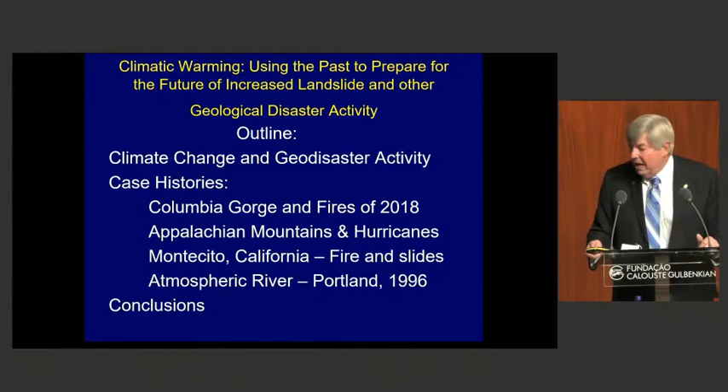That was Montecito. And then I'm going to end up talking about atmospheric rivers. We never really had this name until just about 20 years ago, and now it is becoming very, very common. Why? Because the climate is warming and we are getting more of these atmospheric rivers. I'll talk about one I was very involved with in 1996. But I just came from the Pacific Northwest—Oregon, Washington, and British Columbia—and we had a huge atmospheric river that just hit us last week. I was on television three times just last week talking about this. So that's what I'm going to be talking about today.

So to begin with, climate warming. In the last two weeks we've been talking about COP26 in Glasgow. The whole world has been focusing on the temperatures we've got—1.5 degrees Celsius, that's where we would love to have the temperature maximally increased to, after the original pre-industrial temperatures. Lots of ideas came out about this. Right now we're at 1.1. But all of these different climatic models that we have in the world, they all agree on one thing.

We are going to have many extremes—it's either going to be very, very wet or very, very dry. And with the dry, you're going to have many fires. It all goes back to water and evaporation from the ocean. The warmer the temperatures, the more water that is evaporated into the air masses, and therefore you have greater rainfall intensity, which causes more landslides and other things like that. So we'll talk about the wetter and drier things coming up.

So when it is wetter and there's more water in the air masses, you're going to have hurricanes—more hurricanes, and bigger ones. We have categories 1 through 5, and we're going to be seeing more of these higher categories. Typhoons in the Indian Ocean and also the Pacific Ocean are equivalent to hurricanes—same thing, more and bigger.

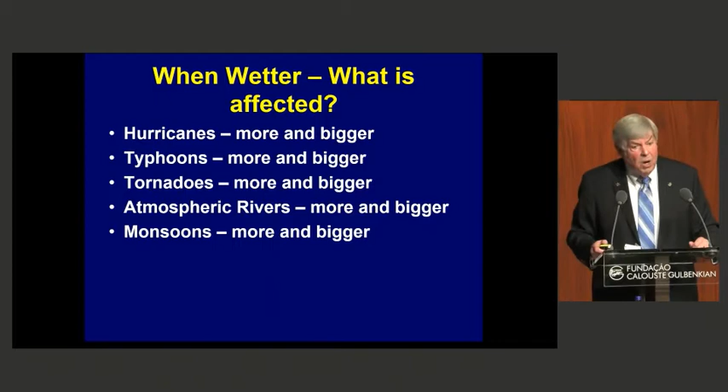In the United States, we have tornadoes. It used to be in just one small area in the middle part, in a very short period of time, for three months. Now it is eleven months of the year, all the way from Mexico to the Canadian border—more and bigger. And then these atmospheric rivers, which I'll explain coming up—there are going to be more of them and bigger ones. Then in India and that part of the world, monsoons—more and bigger. So those are going to be affecting there.

Then on the drier end of things—see, those are the two extremes—what we're going to be having is more fires. You've seen, for instance, in Australia, all of the fires they've had there. In the United States, the western half has a huge problem right now, and in my state of Oregon we've had many, many fires. South America, the same thing. And Africa—I'll mention Madagascar on the next slide. So all of these places are extremes, and that is coming with climate warming.

Al Jazeera, the English version that just came out last week, listed six areas that are the worst hit by climate change in the world today. Madagascar, in Africa—the drought is just awful. South Sudan, the opposite—many, many floods, the worst floods in 60 years. In India, they have both: in parts of the country it's big droughts, the other parts are floods, and people are moving around. They estimated 70% of all households in India have moved because of the climate, one way or another. Bangladesh just has flood after flood after flood—7 major floods in the last 20 years.

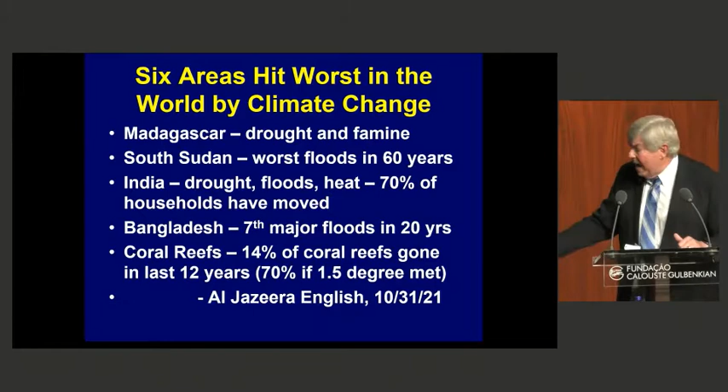And then the coral reefs around the world, which give us a lot of the seafood we have—they've figured out 14% of all the coral reefs are destroyed. And if we do not hit that 1.5 degrees Celsius boundary, we will lose many, many more in the future.

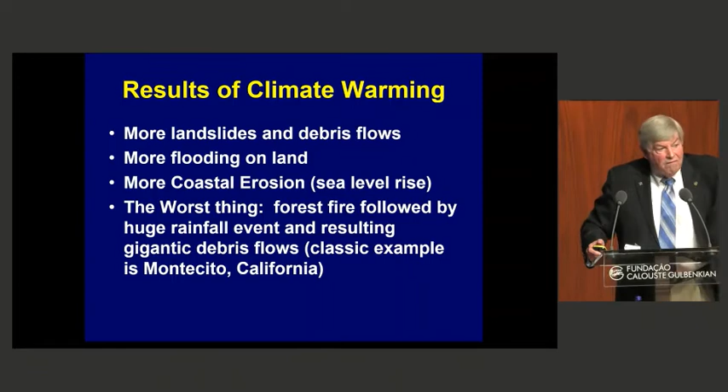The results of climate warming include more landslides and more debris flows, which I will be talking about a lot. There's also more flooding. Along coastlines around the world, because sea level is rising more and more, we will have more coastal erosion. And the worst thing is when you have a combination of fire followed by major rainfall events, and I will talk about Montecito.

As I mentioned, we also have increasing sea temperatures, more hurricanes, typhoons, etc., and then greater rainfall events that we've got.

To begin with, for my first case history, I need to review forest fires. In my state of Oregon, we have many forests - big, intermediate, and small ones. Dry forests are found all over California, Nevada, Arizona, and eastern Oregon. They have very tiny, dry trees like oak and juniper trees, so forest fires are common there. Why? Because it's less than 400 millimeters of rain per year.

But then you have intermediate forests, where we still have big trees like ponderosa pine trees. Average precipitation is 400 to 600 millimeters a year in those areas. You have more fires, but not as big ones. Then in the wet forests, where I live, we have Douglas fir and western hemlock - big, beautiful trees. Forest fires are very rare there, even though at the end of summer it doesn't rain for 2, maybe 3 months. But the yearly rainfall is 1,500 to 2,000 millimeters per year.

So when we have fires in the dry forest that I mentioned, you have abundant debris flows afterwards. You'll have rockfall and activation of small landslides. It's very similar in the ponderosa-type forests.

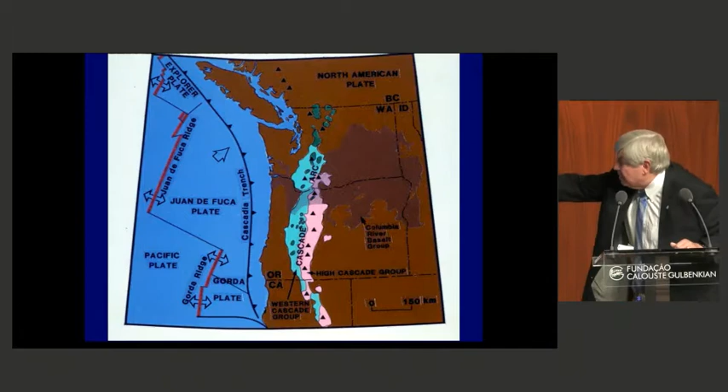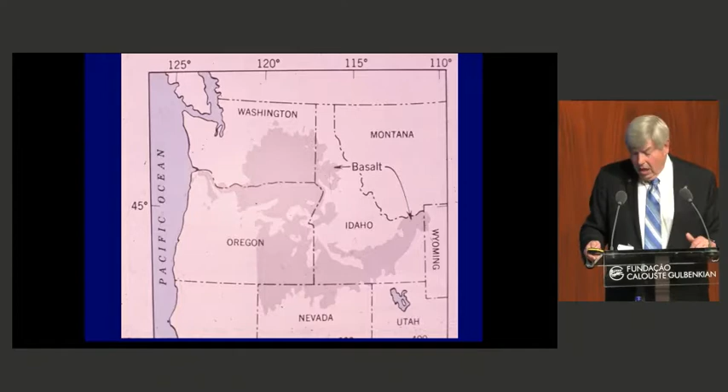We had a fire back in 2017. This is a rainforest - it gets over 2.5 meters of rainfall a year in this particular area. Here's a map of my part of the United States: this is Canada, this is Washington, this is Oregon. We're talking about this area right here. It's all basalt, one layer on top of another, coming out of a hot spot. That hot spot is now over in Idaho, right underneath Yellowstone National Park. We have similar geology all up and down the area, and in it we have the 5th highest waterfall in the United States, Multnomah Falls.

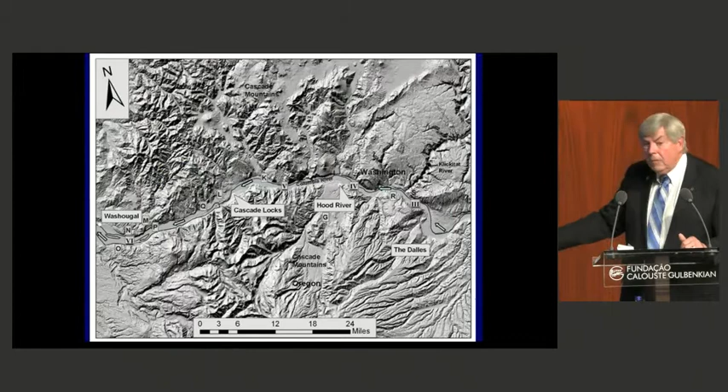There's one lava flow from here to here, one from here to here, one from here to here, and there's a couple more up above. That is the area where we head. So we look at a shaded relief map of the area. Here we're looking north, and here is the Columbia River moving to the left out to the Pacific Ocean. This is the height of the Cascades right here, and I'm going to be showing you this area. That's where the forest fire happened.

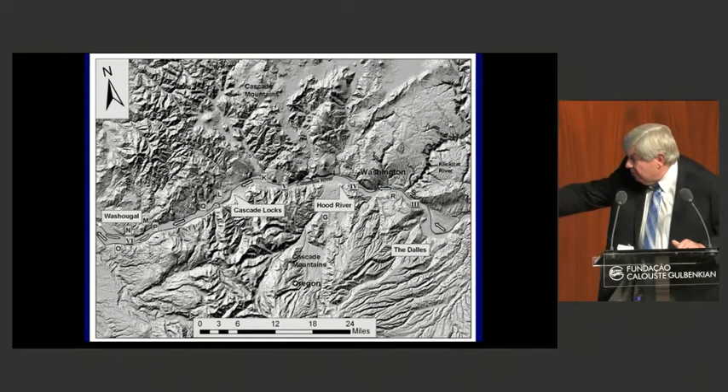This whole area is what we call a national scenic area. It is not a national park. You can have houses, but anytime you build any business or house in there, it has to pass a commission and has to look good. It must not stick out because they want the trees and the rocks and the nature to stick out instead. In our area of the state of Oregon, it's the number one tourist attraction, and it was created back in 1986.

I apologize, I have everything in acres, and you're all used to hectares, but all you have to do is take my number and divide by 2.47, and you will get your hectares.

Just two years ago, 17% of this absolutely beautiful area burned. It started in September, in the fall, and it was started by a high school kid. He was goofing off and he lit a fire in a field, and then he put it on Facebook: look what I did. Well, in the end, his family got charged with a $15 million bill to help, and for the rest of his life, every summer he has to plant trees as a result of this.

So the fire started out in the mountains, and you can see the beautiful forest that we have in this particular area. Here is a map. So here is the Columbia Gorge. Portland, where I live, is to the left. And it's called the Eagle Creek Fire.

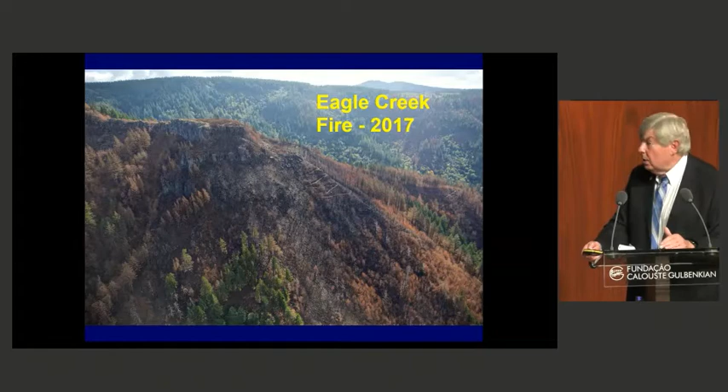This is also an area where a lot of people go hiking, and the views from the top of the gorge are incredible. After the fire, they had to close down all of those trails. So here's the Eagle Creek Fire that you can see in the state of Oregon. I live down in Portland, down here.

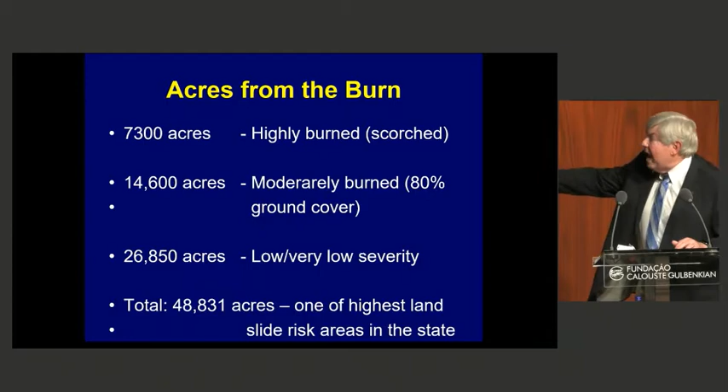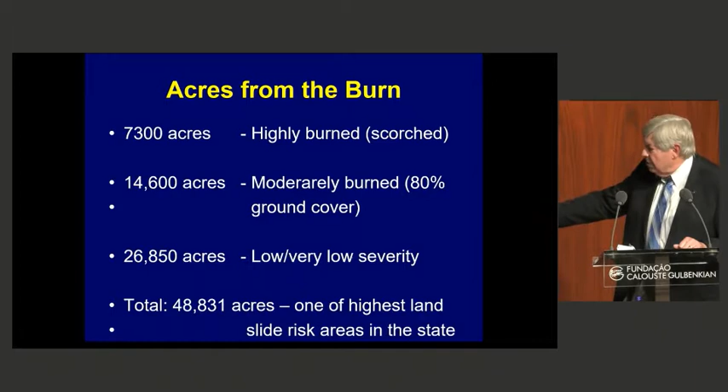In the end, we almost had 50,000 acres burning, 17% of this whole national scenic area. 7,300 acres were highly burned, scorched. There was no A horizon or O horizon left, just mineral earth. Then moderately burned areas, 80% was still there. And then low burn ones, which we'll show you in a second.

So what we did is we went out and actually flew the whole area taking air photos, and then digitized it, figuring out how much of this area is heavily burned, slightly burned, etc. Here is the gorge right here, and this particular Oneonta Creek Gorge was heavily burned. Then the one right next to it, Horsetail Creek, then Tanner Creek, and then Eagle Creek — those are the areas that were the worst burned.

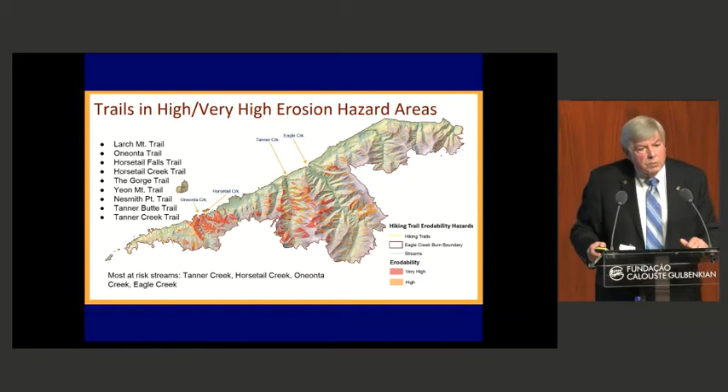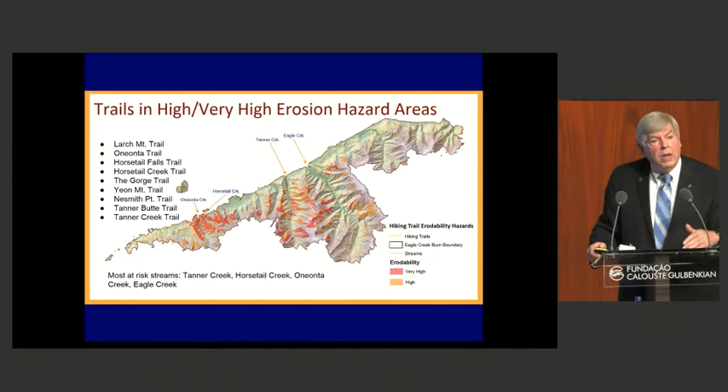We are now predicting — remember, this is a rainforest, and those roots are still holding the rocks in there — so it is going to take 5 to 10 years for the roots to break down and the debris flows to come out. Right afterwards, we had lots of surface erosion, and the creeks were very, very black in color.

We had increased rockfall on all of the trails, and that was important because we had to close down all of the trails. Engineering geologists had to hike around and see each one of these trails to determine if there was a potential for rockfall coming down. I'll show you an example of what we did in an earlier fire.

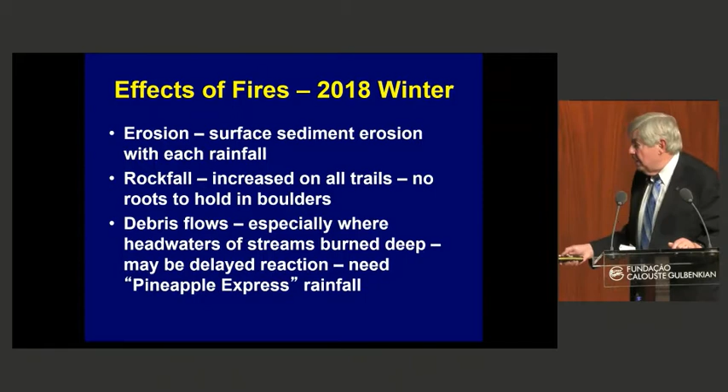I did a lot of television time, and everybody said, what do you predict? I said, we got to go back to 1991 when we had the last forest fire here. Everybody said, we had a forest fire in 1991? Yes, but everybody had forgotten about it because the rainfall was high and the vegetation had grown back. It went right down in back of Multnomah Falls, which I just showed you before. But I said, what happened then will occur in the future.

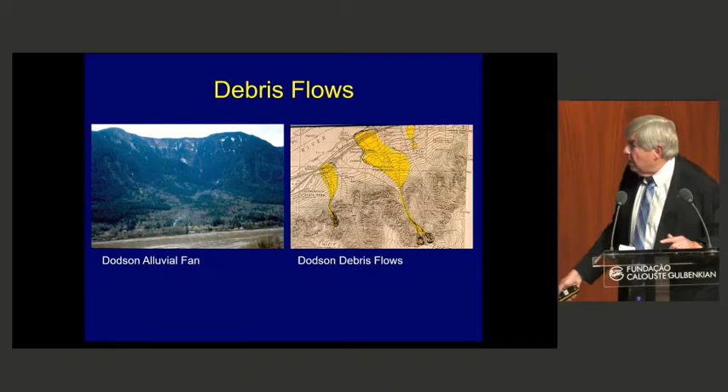Remember, that was 1991. This is 5 years later, 1996, when we had these particular debris flows occur. Mrs. Royce was making lunch, and she looked out in the pasture in back of her house, and she saw a wall of 2-meter-high boulders rolling across the pasture towards her. She said to her husband, 'Hirsch, I think we better get out of here.' The good news is it was moving very slowly, and that was the front of a debris flow coming down, and they survived. Over the next 4 days, their house was completely filled up.

In back of where I took this picture, this is what the highway looked like, completely slowed down. If we went to the left over here, that is where the next debris flow came down, at 10 o'clock at night. The highway with all of the trucks was stopped and they were lined up, and the train, a major transportation corridor, was also stopped. At 10 o'clock that night, the debris flow came down at a very fast velocity, knocked 6 cars of the train into the river and 9 trucks into the river as a result.

If we went back this way, 2001, another 5 years later, we had another debris flow come down and fill up the intersection there, coming out of that area. So it's this delay reaction: 5 to 10 years later is when you get the major debris flows coming down, something that nobody had actually taken a look at.

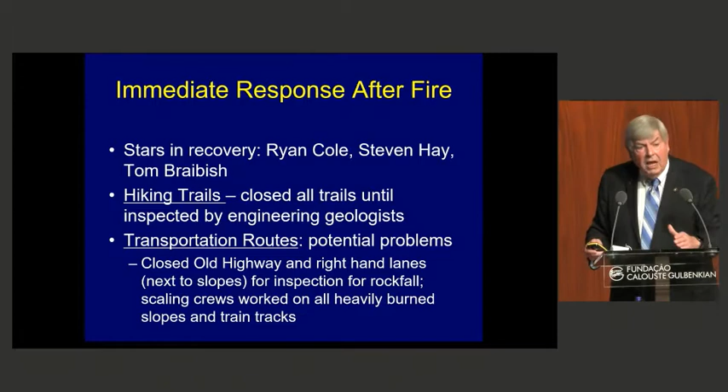I was very proud after both of these fires because my students, Ryan Cole, Steven Hay, and Tom Braibish, the last two working for the highway department, closed down lanes. You could not have cars next to them until all the slopes were checked by an engineering geologist or rock mechanics person. Ryan Cole ensured hiking trails could not be reopened until checked out by an engineering geologist; some were closed for a year and a half. The transportation routes and hiking trails stayed closed until we knew it would be safe for people to go on them. For these fires in this type of forest, with high rainfall events, we know we will have future debris flows, and we have predicted and shown you the 4 that we have there.

But it's a delay of 5 to 10 years that is going to be down the road. And actually, we had one from the previous year that killed a lady just this past year.

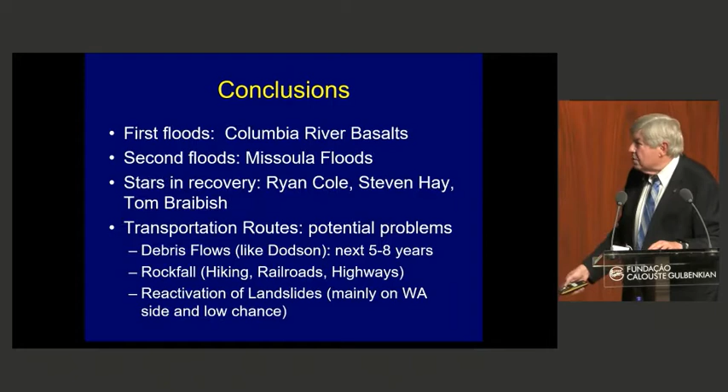Okay, so these are where we predicted. Let's move on to the next topic: climate change in the western half of the United States and the wildfires we've got. This was a report that just came out last week, and some of the fires we had in Southern California.

But I really want to highlight the poster child, the best example of a major fire followed by a major rainfall event: Montecito, California, January 2018. A dry area of Southern California just outside of Santa Barbara. Remember, it's a dry forest with very small oaks, so it burned a very large area. The U.S. Geological Survey came in and mapped the whole area.

Two days later, they had a susceptibility map showing where the debris flows would originate from and where they were going. That report was given to the city of Montecito, but it didn't get applied. This is a problem: the communication between the scientists and the governmental agencies.

Then on January 9th, just one week later, a major storm came into the area. 23 people were killed, 163 injuries, $177 million in damage, $7 million just in emergency response. A lot of times we forget how expensive it is to have all the emergency personnel coming in afterwards.

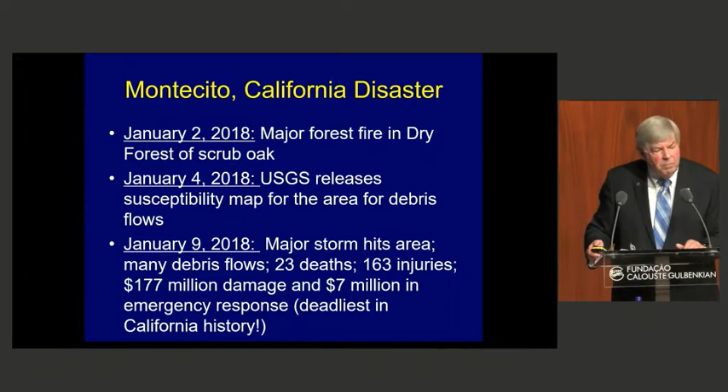This is what the whole town looked like - all of these debris flows with large boulders coming down, hitting the houses, destroying the houses. 23 deaths, and then 400 houses damaged or destroyed. This is always something that we have to worry about.

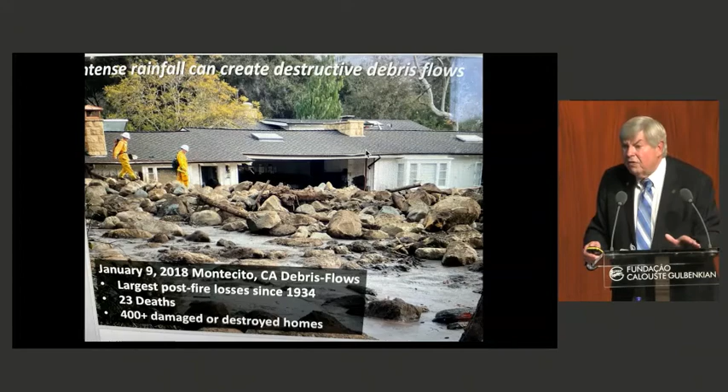And that's why the U.S. Geological Survey works on it. Here's their model: they immediately get in and map where all of the burning occurred and the degrees of burning, as we showed you in the gorge a few minutes ago. Then, based on their models, they predict this area will produce a debris flow of this size, that area will produce a debris flow of this size, depending on the rainfall. So here they look at the potential rainfall coming in, and the amount of material moved.

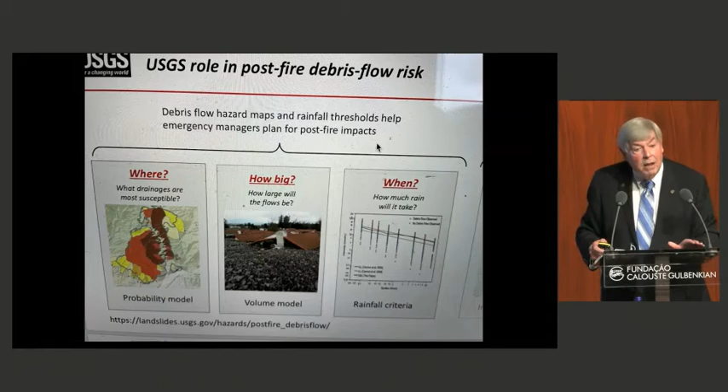This is important - something to try and save lives and save property. The problem is, in this case, the report came out, but it was not enacted by the local government there. Now we know better about doing this in the future.

This is the last of the case histories I wanted to talk about, which occurred in the Pacific Northwest: the atmospheric river. This was a term we weren't using 2 or 3 years ago, but now everybody who is a weatherman or weatherwoman on television and radio is always talking about atmospheric rivers.

This is from my newspaper on November 17th - just a very short period of time ago that this hit. This is the area of northern Washington, the next state up. Everything was flooded out, with lots of debris flows and landslides created as a result of this.

In the old days, we used to call these pineapple expresses. Let's see what an atmospheric river actually is - they're found all over the world, coming from the central part of either the Pacific or the Atlantic. Europe has them too.

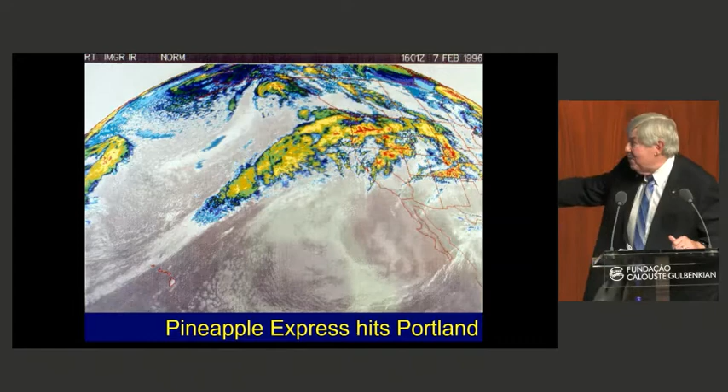Here's Hawaii - we call them pineapple expresses because they came from the land of pineapples, with very warm temperatures loaded with water, and then they come in toward the Pacific Northwest: California, Oregon, Washington, British Columbia. This is one from 1996, but the same thing happened this past week, and that's what we were dealing with.

As I said, the name atmospheric rivers only originated in the late 1990s. Two professors at MIT in Boston came up with this idea. This is a very narrow band of very wet moisture coming into an area, and they originate from the middle part of the Pacific and the middle part of the Atlantic.

What they do is cause lots of landslides, debris flows, and floods as a result. The last major one that hit Europe was in 2015. It originated in the Caribbean and aimed mostly at the UK, United Kingdom.

Something that has just started is now they are going into categories. They have category 5, 4, 3, 2, 1. Category 5 is the wettest. It's just like they've done for many years with hurricanes, and when you have a category 5 hurricane hitting you, it's a big one.

This has only happened in the last 6 months. This atmospheric river event that hit the Pacific Northwest was a category 5. And all of us said, wow.

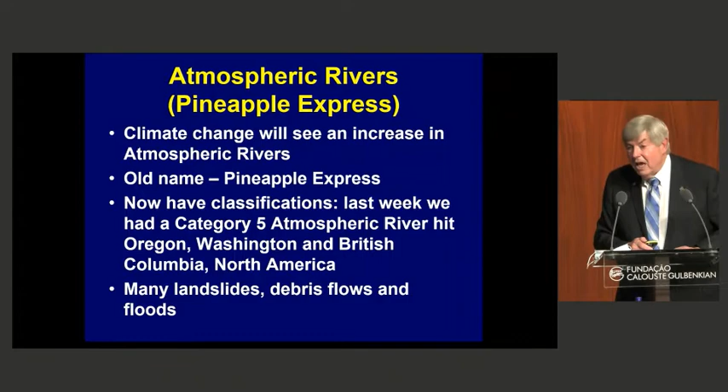Generally in Oregon, where I live, we get one category 5 a year. Washington gets one every 2 years. California, Northern California gets one every 3 years. Southern California, one every 10 years. But in California, they need water. So it's always about 50% of their annual precipitation that comes from these events.

I want to take you back to 1996. That was our last major pineapple express, or atmospheric river, that came and hit our area. In 4 days, we had 20 centimeters of rainfall fall in my city. My city has some big mountains and some flat areas.

I had 3 graduate students who were working with me, and we had lots of flooding, but we also had lots and lots of landslides. So for the next 2 months, we visited all 712 landslides that we had in our area.

With that, we categorized each landslide. What was the process? What's the geology? What's the soil? What's the slope angle? All of those things, trying to put together a story, trying to figure out that in this extreme event, certain parts of town would get certain types of landslides, and other areas would get other types. So I'm going to show you a few examples.

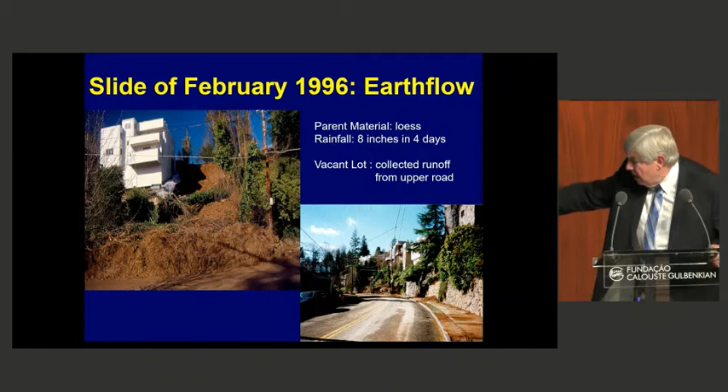A lot of these are going to be urban, but some are also debris flows. For instance, anytime you had a vacant piece of property, who owns that property, who controls it? We had many landslides on them. You can see an earth flow that came off of this piece of property, a nice house here - I'll show you the other side - came down onto the road you see here.

In the next one, where did all that water come from? Well, all of the storm water went down the street and had no place to go. It just went over the edge. There was no collection basin or drain there to pick it up, and you had a major landslide.

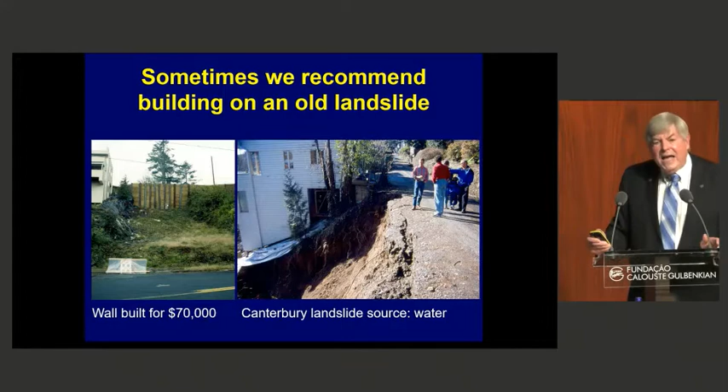So what do you do? You build an I-beam wall - one standard graduate student for size there. But they forgot to put a drain in to collect the water. Two years later, what happened? The whole thing blew out, and it was exactly this time of the year, because it came across the street and hit this lady's house.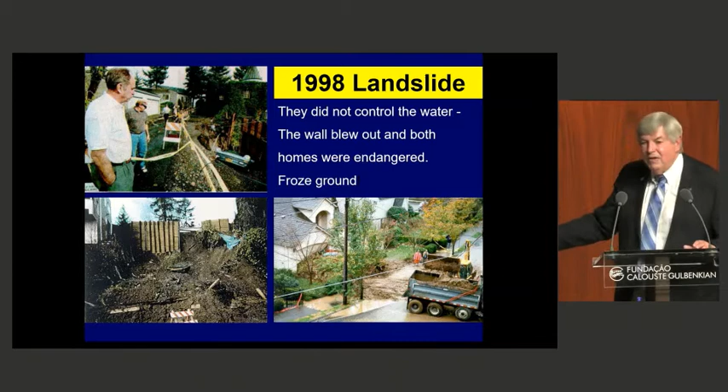In the United States, every year we have a special holiday called Thanksgiving - it's coming up this Thursday. She was having 12 people in for a Thanksgiving meal the next day. She was a little mad at having her house hit. This was just an example.

In the end, this is the only time in my life I've ever actually recommended building a house on an old landslide, because you had a huge hole in the ground. They tried to freeze the ground next to it because you had a castle here, and the walls were falling off, creating huge cracks inside. Freezing the ground did not help.

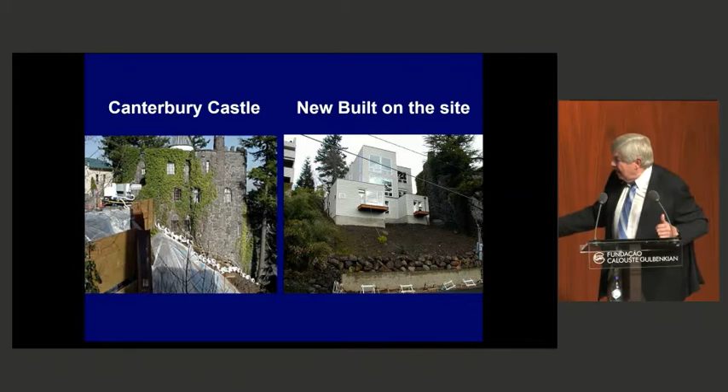So they built a house, over-designed by the geotechnical engineers. But actually, I don't think it's a very beautiful house in between all these others. But it doesn't matter - it stabilized the slope. They've never had a problem since that time.

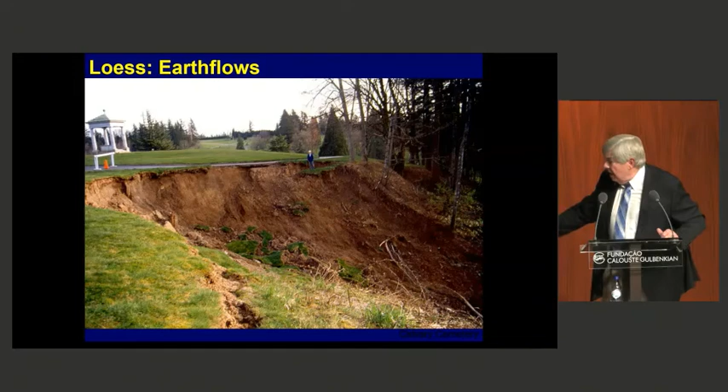Let me show you some other examples. A cemetery, very close to us. Where most of the landslides occurred are the mountains next to Portland. These are loess soils, wind-blown silt, L-O-E-S-S - for those of you who speak German, Loess is the name - and ML soils, they are highly erodible. You can see, in English, we would say there is a grave situation in this cemetery that we have here.

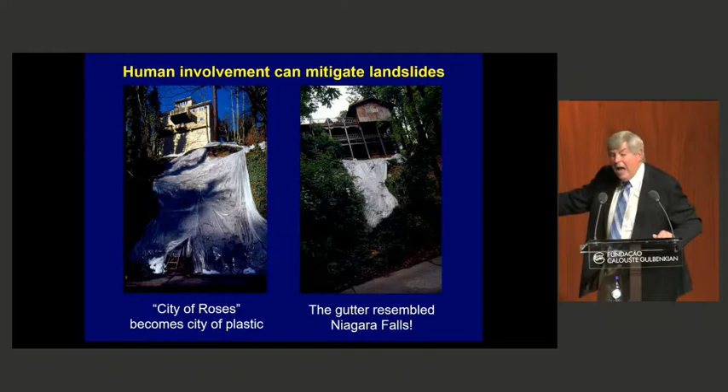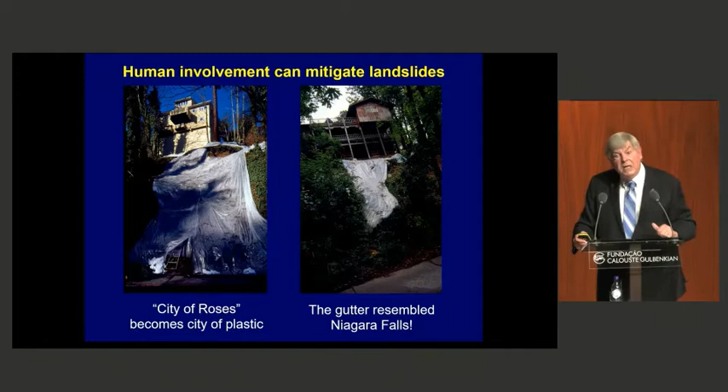As we would travel around the city of Portland, we would map all of the plastic because it meant that there was a landslide there. This house had to pay over $100,000 to repair and stabilize their land. This one, $70,000. And when we talked to the people here, the lady said, I had a waterfall coming out of my plugged gutter for 4 days. All that water concentrated here, and what happened? It failed and you had a landslide.

This is typical in an urban area where you have these types of things happening. But you didn't always have exciting landslides for me. We had 4 houses in a row right here, and what it did is reactivate the upper part of an old landslide, a paleo landslide. If you looked out the window from here down the slope, you can see the hummocky topography of an ancient landslide. The whole thing reactivated.

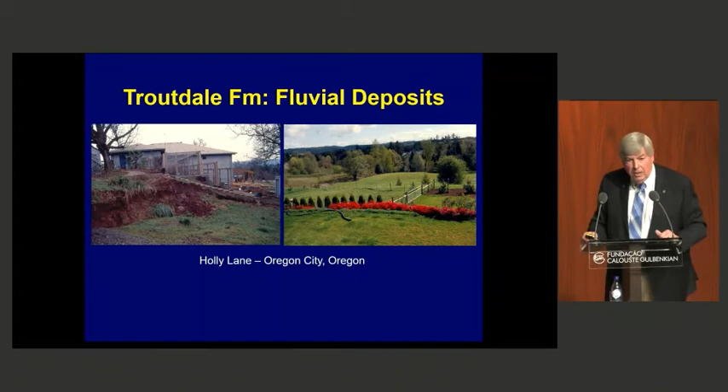When an old landslide reactivates, it also reactivates at the scarp, and it dropped 1 meter, going right through the houses. All of those houses had a big crack going right through. All of the pipes, all of the electrical, all broke. All of the driveways, etc., all went down. As a result, those houses were destroyed and had to be removed. Reactivation of an old landslide, big deal.

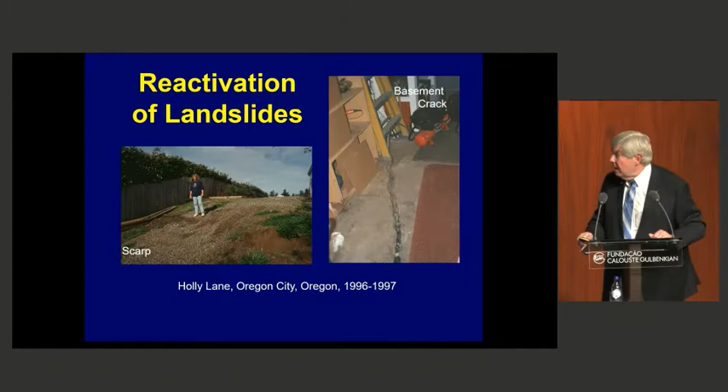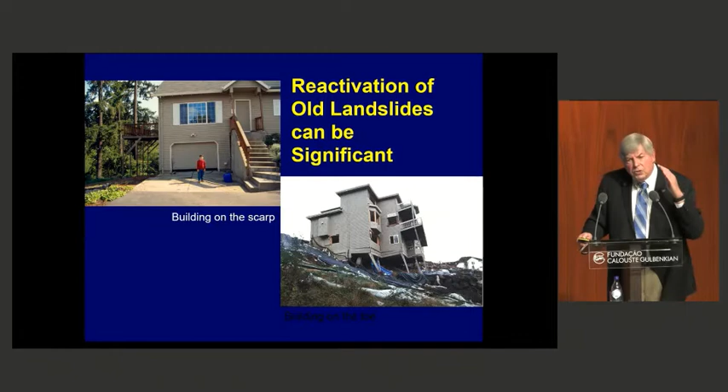Here's also reactivation of a landslide. This house was on a slump, and it just rotated like this. This one went right through, a new house, only 2 years old. The crack went right through, and the house was destroyed completely as a result. This is typical with these atmospheric rivers, huge amounts of rainfall in a short period of time.

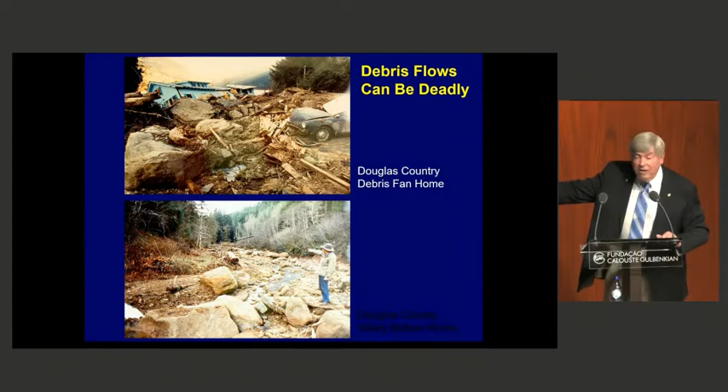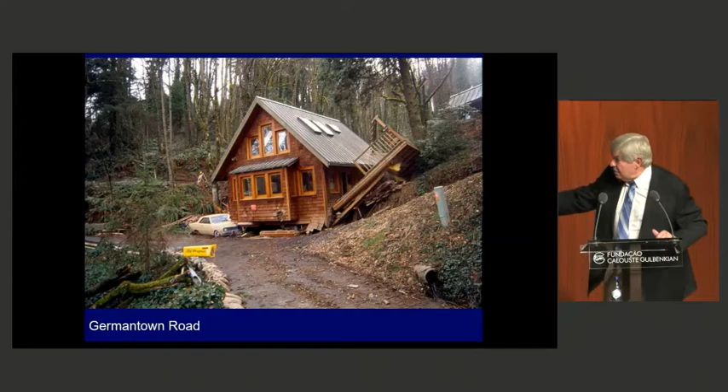It's a process that has been there for a long time, and it happened again. In this one, in the valley over the mountain that you see here, you had another debris flow that came down and hit this house. The good news is nobody was killed in either of those cases. Here's a smaller debris flow. This house was moved 5 meters off of its base. Not only did it destroy his house, it crushed his car as it bounced down on top of it.

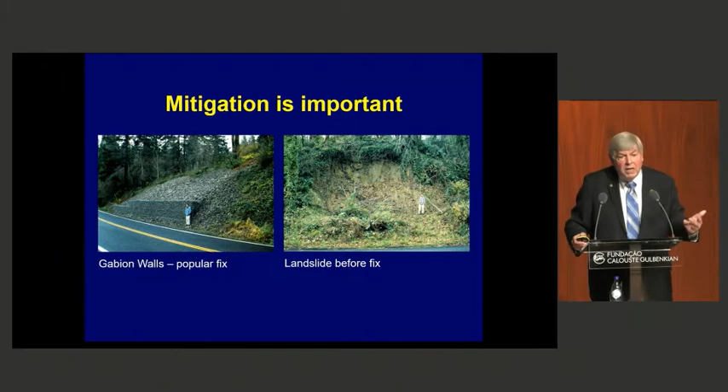The good news is many of those landslides were small. This is what they would look like beforehand, and then we would come in and build a gabion wall. We would put filter fabric down, crushed rock, and backfill — cheap to put in, lasts a long time, well drained, and they have worked for all of those times. So we learned something about these types of landslides that occurred.

In that one event, 52% of all of the landslides occurred in the cut slopes, generally next to roads and next to houses. On the other side, where they had put the fill on the outside of the road, we had 15% of the landslides. Then 9% of them, if they had controlled the water on their property, would not have had a problem — that is, gutters that are blocked and water concentrating on the slope, or water coming off of a patio or driveway or things like that. And why is that a problem? Because landslides are not covered under homeowners insurance, and all of those people, those 9% there, lost everything.

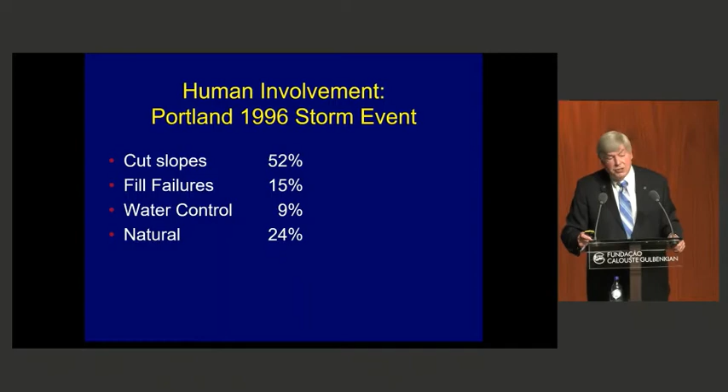During that atmospheric river, the focus was all on the flooding and the rivers rising, and the problems there. But in the end, the amount of money spent on the landslides was equal to that, and that's something we forget about as a result.

We're seeing more and more of these atmospheric rivers as they occur more and more. Before 1996, an atmospheric river in the Pacific Northwest would occur about every 10 to 15 years. Then from 1996 until 2010, maybe every couple of years. Now we're getting at least one a year, and this year we've had 2. These huge rainfall events are related back to increased evaporation of water from a warm ocean and the air masses coming into the Northwest.

It's interesting, earlier I mentioned about Europe. Actually there was one that hit Iran in 2019. It came off of the Mediterranean area, that's where it originated, and it hit the Zagros Mountains. 76 people were killed from the landslides and floods that occurred in that one.

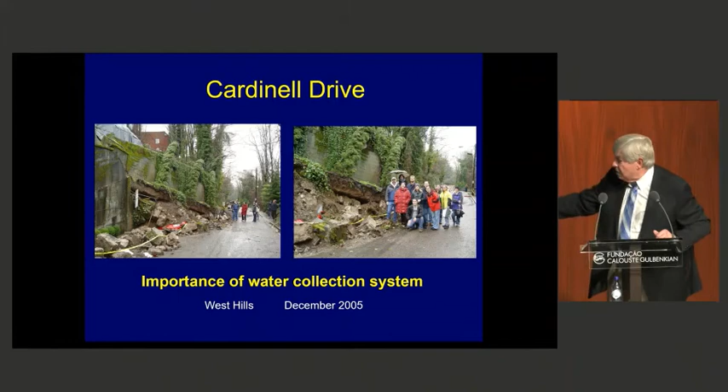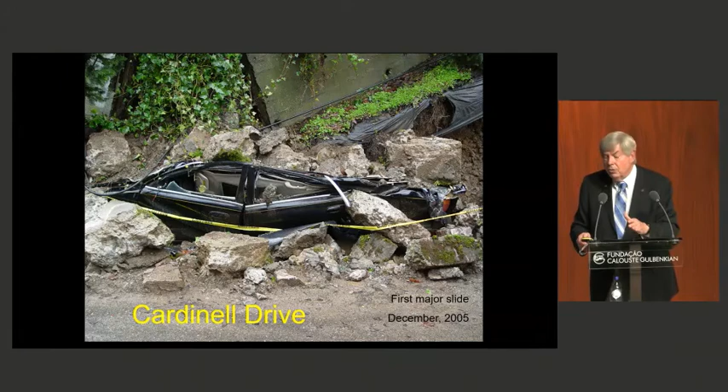So here I've got some of my students with me, the university is only 5 blocks away. We walked over to see this car destroyed here, and right next to it, that car destroyed. And I said, well, we need to spend more time. Every year I spend more and more time getting people to check their houses, make sure the gutters are working and the water is going into the drains and the drains are actually working.

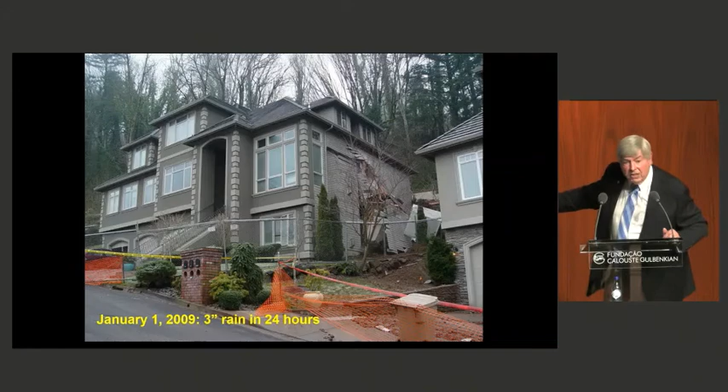Here is another one of these atmospheric rivers. We had basically 3 inches of rainfall in 24 hours. A landslide came down and hit this house, and the landslide came out on the side. This was back in 2009. So here is the landslide that came down. The next picture will be taken up here. You can see the landslide came down and destroyed the house and went out the side. Now let's go down the road.

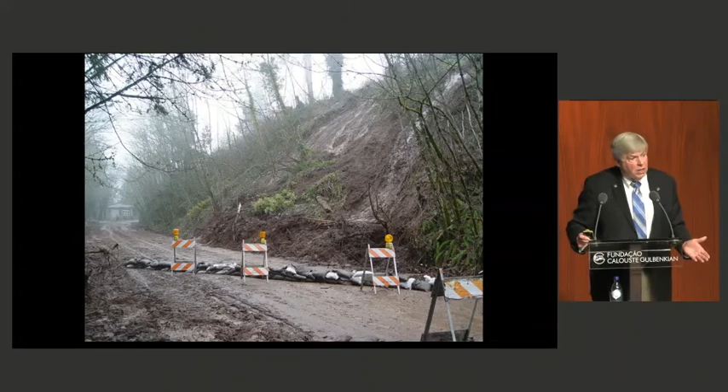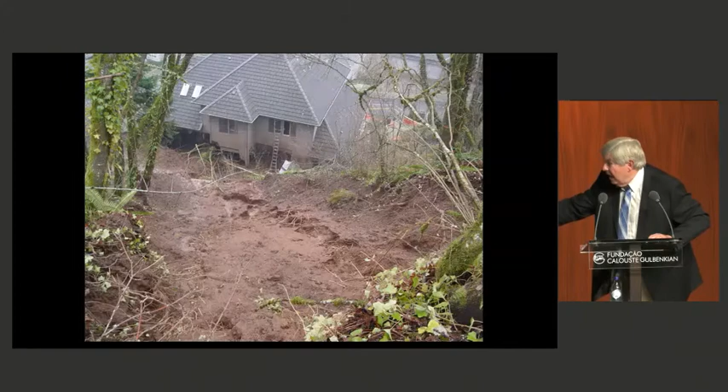So the normal vegetation around there is this forest, Douglas fir, western hemlock, a good stable forest. But if you go up the hill, right up to here where the landslide occurred, this is what it looked like, and it was obvious to me that all these trees had been cut down. When you do that, you change the hydrology of the soil. The landslide came down here, blocked the road, the water coming down the road hit that landslide, went over the edge, and then caused the landslide that destroyed the house. So this is an example of cutting too many trees down when they shouldn't have.

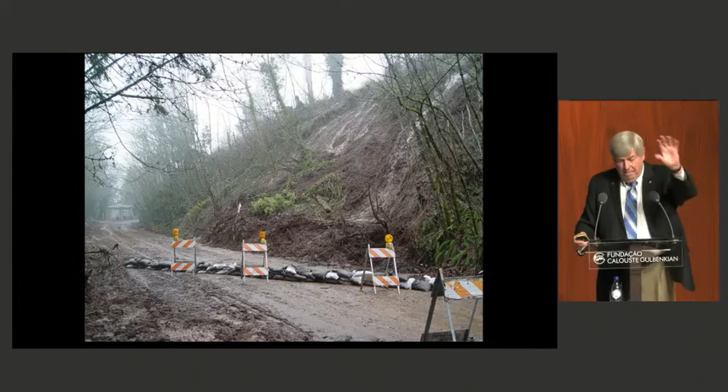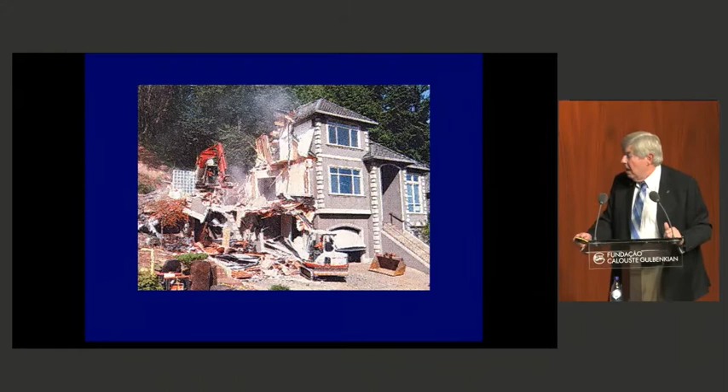The very wealthy man at the top could see the mountains off in the distance, and it caused the landslide. He had intense rainfall in a short period of time, and in the end he lost his house. Insurance did not pay it, and he had to have it torn down.

Another one of these atmospheric rivers came in, about 3 years before that one. This was just south of Portland. There was a housing development on the side of a hill, and all the houses were on flat pieces of property. Well, we looked at them on the LiDAR.

They were all rotational slumps where the landslide had come down and created a flat surface. They didn't realize they were building houses on old landslides. Not a good idea. This house was on one of them. Water that was diverted would not pass through that small conduit. Look what happened to that house. The whole thing reactivated and was destroyed, and again they lost everything.

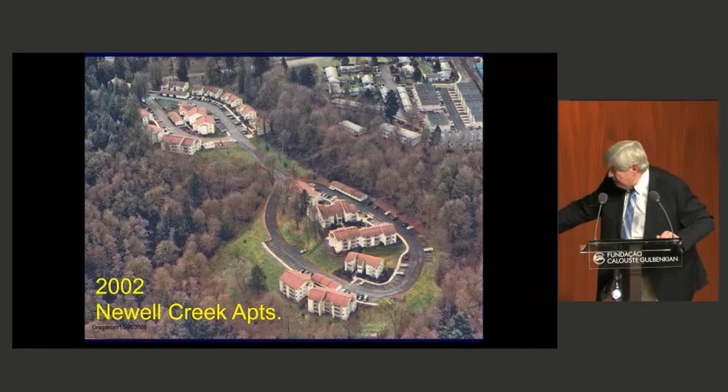This particular slump reactivated with another atmospheric river in 2006. I'll show you a picture where the water pipe and sewer pipe break. What's that telling you? Mother Nature is shouting out, it is moving. The next picture is down here at the parking lot, then down here, then up here with big cracks, and then the last one here.

So let's show that. This was just after Christmas time, January 6, 2006, and the pipelines broke. People said, whoa, what's happening here? They went down to this area and looked at the parking lot. Oh, we have a little scarp developing.

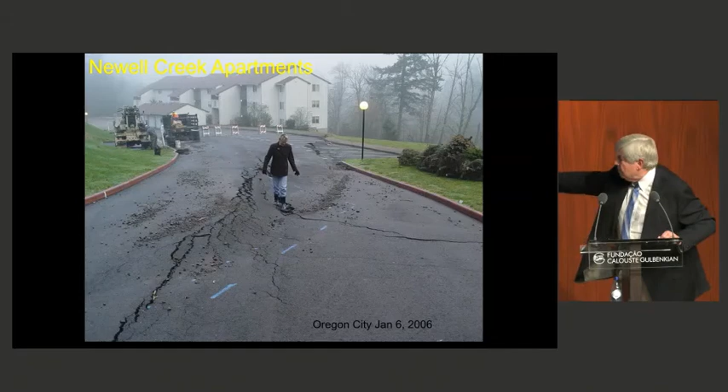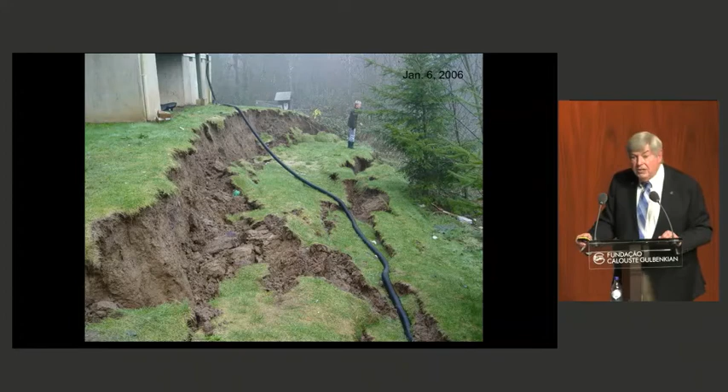Look at the Christmas trees right after Christmas. Then we go around to the edge, and you have a bit of a problem here. The toe of that old landslide has reactivated and it's moving. They said, whoa, we better figure out what's going on. So you go up to the top and start seeing big cracks. Why? The whole thing is moving in that direction.

Being a good engineering geologist, what do you do? You put in an inclinometer. You drill a hole down, put the inclinometer in, and the next day it broke off at 15 meters down. That was the depth of the landslide that had reactivated and was moving.

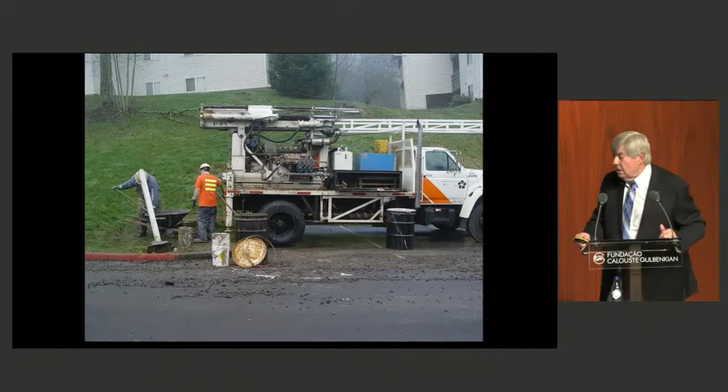Eventually what they did is tear down all of those houses and apartment houses, and they're not using the land. These are the things that happen when you get these atmospheric rivers coming in.

It hit the propane gas tank in back of the house, caught on fire, and it burned down. The good news is the people got out. The good news also is the house burned down, so fire insurance would pay for it, whereas if it had not burned down, they would have gotten no money from the insurance companies.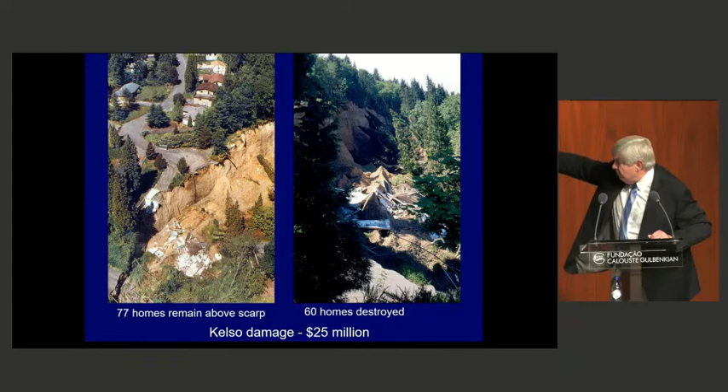Here was a small turnaround, 4 houses right here. Those 4 houses are right here, they're down, they fell in down there. And then you can see one there. All the houses look like this as they reactivated.

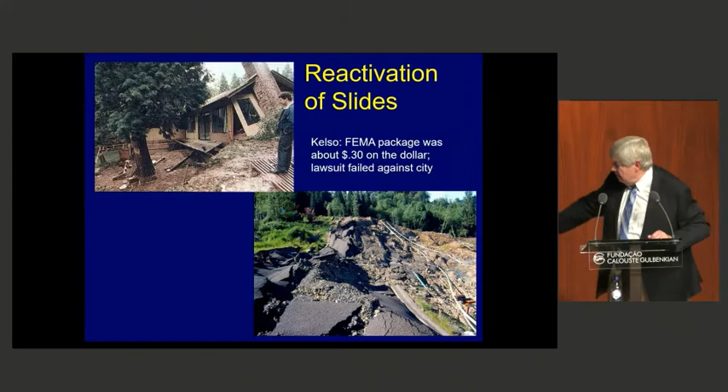Nice houses. Here's the major street, and they tried to keep the water, sewer, and electrical open, but it just did not work. And you can see these houses over here.

This guy, Dan, his was the very first house to move. In fact, his house actually moved down about 250 meters down the hill, did 360 degrees, and then fell apart. So reactivation of these old landslides is a big deal for us, and that's why we go out and map all of the old landslides.

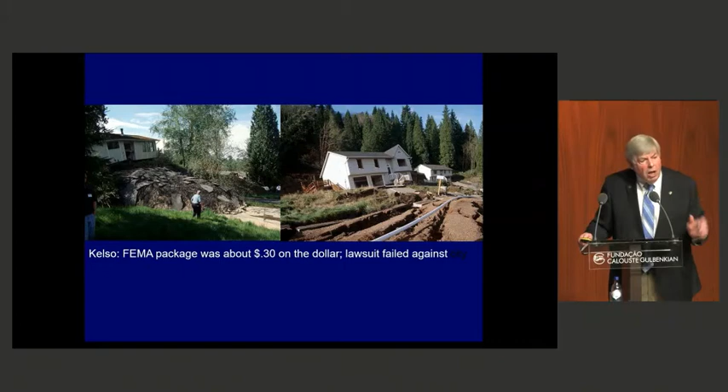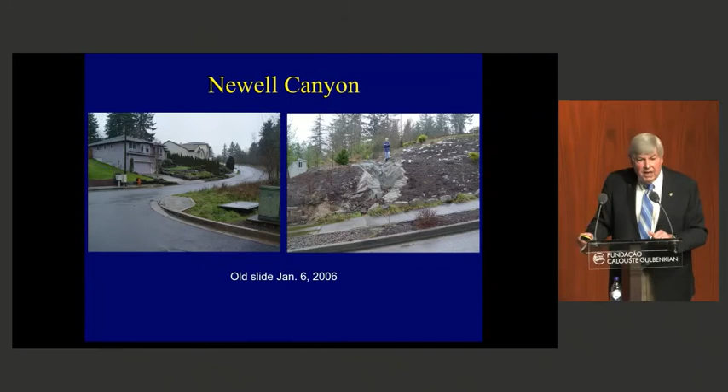Here is a housing development in Portland, and if you go up to the top you look, there's the scarp. It's moving. They actually put plastic in there to keep the water from going in and reactivating that landslide. We told them, you better do this or otherwise you will have another Kelso in front of you. Just one last example is another reactivation during one of these atmospheric rivers of a housing development.

Every year in Portland, they build very expensive houses, they call it the Street of Dreams. There will be 15 houses, built in the summertime, then sold after people go through them in the fall. For 1 month, you could go and see all these 15 houses. This was called Hidden Lake Estates.

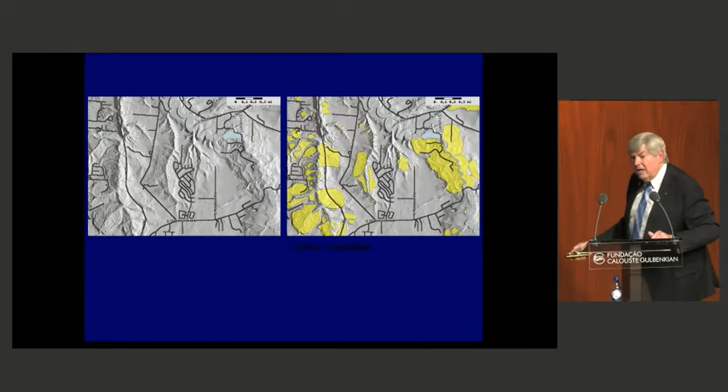I showed you earlier, here is another landslide over here. That is the one where the 4 houses were split in half back in 1996. This is where the old landslide reactivated, and I'll show you the picture of the area.

Here is the creek, Abernethy Creek, coming in, and it's coming into a meander bend. It's cutting the erosion into the slope. So you're looking up, and what's happening, this old landslide is just moving down, including the house that is up on top of it.

Then the house next to it said, what do we do? There's another very expensive house, $2.9 million. What we did is we put a cutoff wall in here to stop the water coming down, and then put a buttress at the bottom.

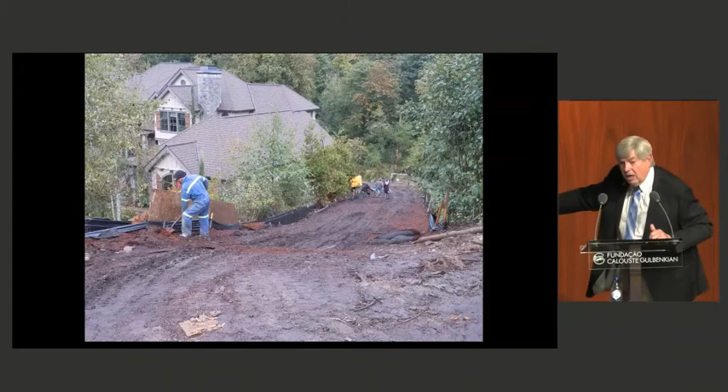And as a result of that, the people got to stay in their house. It's never been a problem, and they could live happily ever after, we hope, until the next major atmospheric river comes in.

So let me take you back to the Appalachian Mountains for a couple of photos. All of my pictures have been taken in this part of the United States. Atmospheric rivers come in here, and we also have hurricanes created in the Caribbean that then come into the United States and move up the coast, hitting Georgia, South Carolina, especially North Carolina and Virginia.

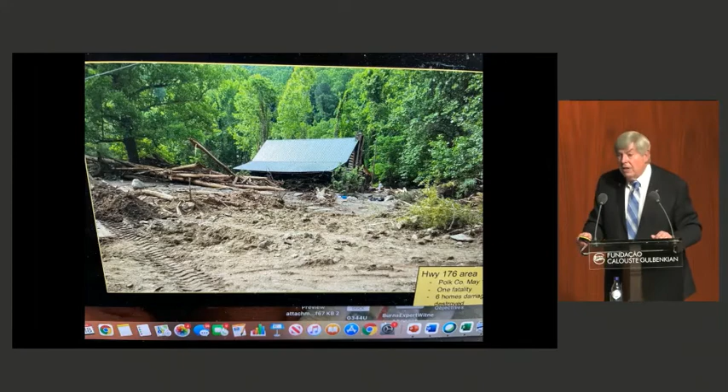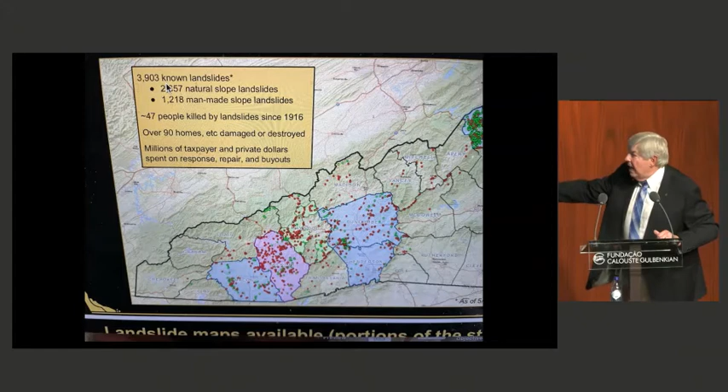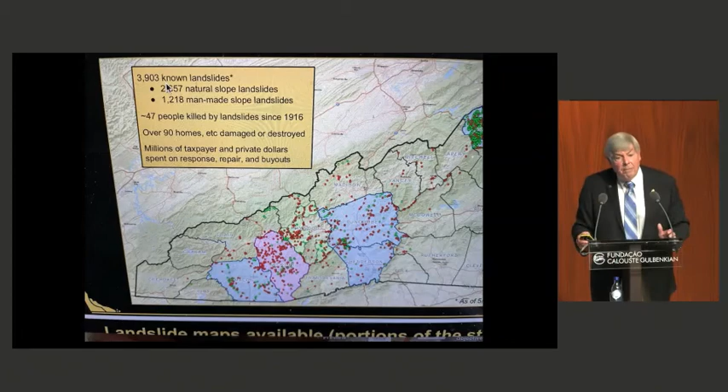And they create debris flows and landslides. This is so typical — this is in North Carolina, where I have friends mapping all of these. Now, because we are having increased hurricanes and increased chances of more landslides, they are investing money into producing the maps. Studying them in the past, they've found almost 4,000 known landslides here. 47 people have been killed since 1916, but the numbers are increasing because of the number of landslides. It's a big problem in that part of the country — equivalent to an atmospheric river, but actually different.

This was also just in the news last week, up in Wales in the United Kingdom. They've been mining coal there for a long time, and when they take the coal out, they have extra rock and soil that they put into a large pile called a tip. Some of these tips are very, very steep.

Back in 1966, in the town of Aberfan, one of these huge tips created a large landslide that came down and killed 144 people, including 116 children in a grade school. So they are very sensitive to this, and now they're mapping all of these tips and restructuring them for the potential increase in atmospheric rivers coming up in the Atlantic and hitting the UK, causing similar types of landslides there.

So they're working on that.

So to conclude, I want to summarize how we, as geoscientists, soil mechanics and rock mechanics engineering geologists, strategize to reduce the number of geodisasters. First of all, we want to communicate — too many times we talk to ourselves and not to other people. We need to talk to governmental agencies, and the information we generate needs to go into producing better building codes and land use planning — where do you build and where do you not build?

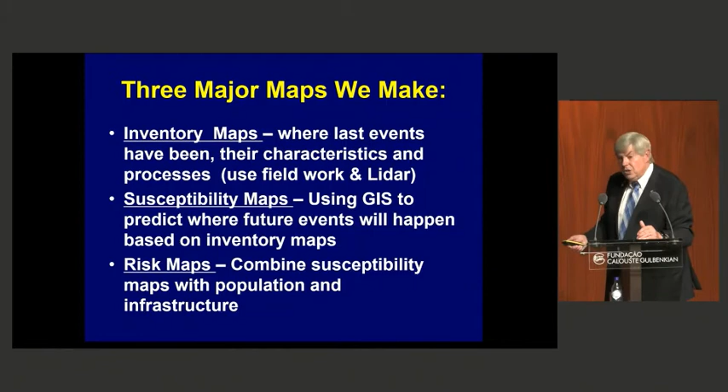And then lastly, risk maps. You combine population and also infrastructure. If you have a huge landslide problem in the middle of a forest where nobody is living for many, many miles, it's low risk—you don't put your money into that, because all government agencies are short of money. As a result, they only can spend money on the highest priority places. The risk maps help you do that. And so we need to teach our students how to make all of these things.

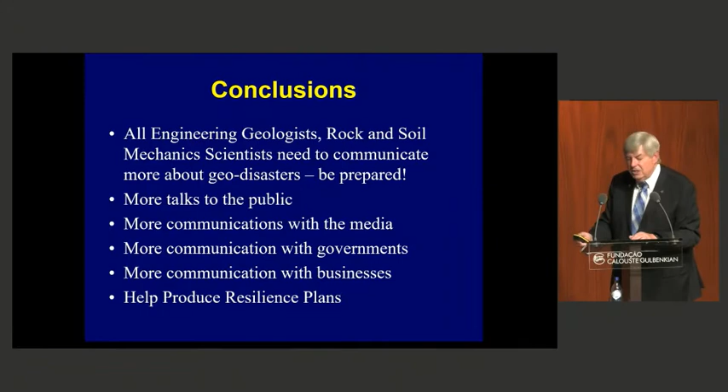So in conclusion, engineering geologists, rock mechanics and soil mechanics specialists—all of us need to communicate about these geodisasters. Not only talk among ourselves, but also talk with the public. More communications with the media, very very important. And the governments and businesses—get those businesses to get business resilience plans.

And in the future, what do we predict? First of all, we're going to see increased landslides, floods, coastal erosion, just because the climate is warming. More evaporation of seawater is occurring, and that moisture is getting into the atmosphere, and rainfall intensity is increasing, and so will the number of disasters. We need to be proactive. We need first of all to slow down climate warming.

That is going to be a major problem in this world today because we are so split on what to do there. And then not only will we have increased loss of property in the future, much of it not insured, but we will also have increased loss of life as a result of this. And so we must respond as a profession. Thank you very much to all of you for coming out and listening tonight. Thank you.